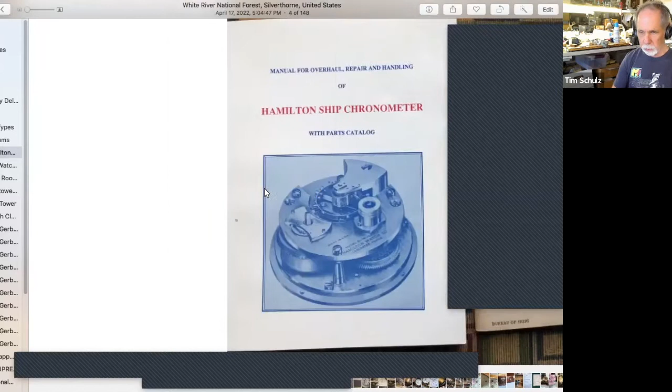These are reprints of the technical manual that the military or the Navy published for servicing and handling of the Hamilton ship's chronometer. The book on the left is the same as the book on the right, just slightly larger and printed on higher quality paper. You can also find, I think, all of this as PDFs online in various places.

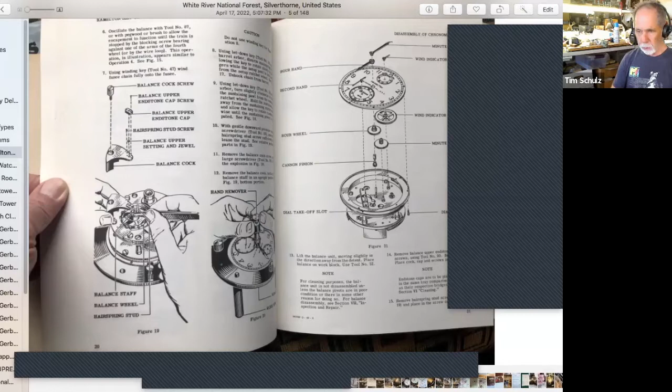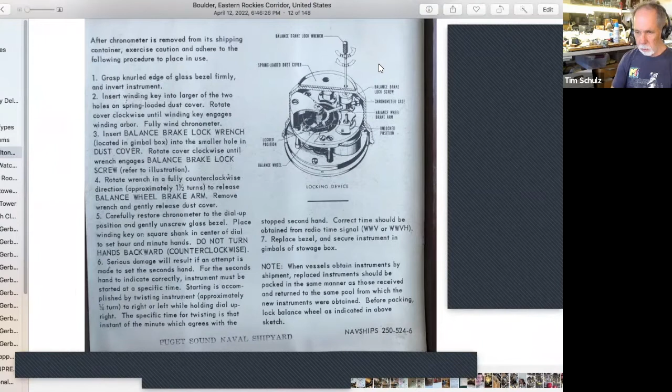This is one that you could do without removing the chronometer from its bowl. This was the original Hamilton balance locking device, which was a simple little arm on a screw that you would swing around and capture the mean timing screw on the balance, the weight, and that would lock it in place.

I actually like this design the best, but you have to take it out of the tub, and you have to get this thing on the balance wheel without damaging it. The Naval Observatory decided it'd be best if they could avoid that. The very first Hamilton chronometers didn't even have this—they had nothing.

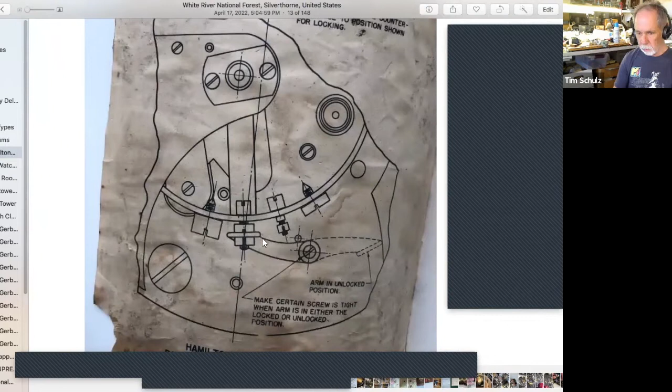In the late 1930s, actually June 26th of 1940, the superintendent of the Naval Observatory put out a request to all American manufacturers to build a marine chronometer for the Navy. The Navy was in the process of massive shipbuilding and needed marine chronometers, but there was no marine chronometer business in the United States building these larger chronometers.

During World War I, they were taking higher quality pocket watches and sometimes putting them in little gimbaled mounts, sort of like what we'd call torpedo boat chronometers, but they weren't necessarily dedicated detent chronometer escapement devices. They were just highly finished conventional pocket watches.

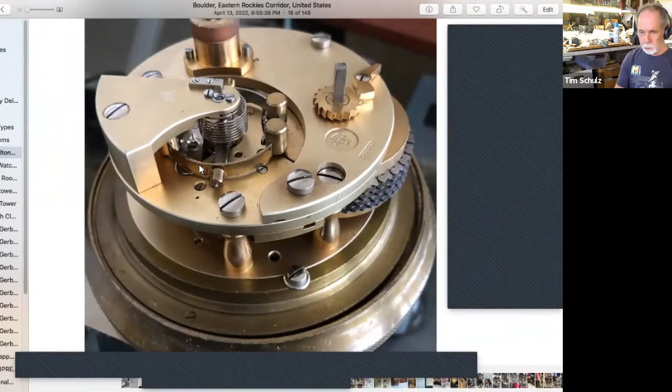So here's a picture of the Nardin chronometer. This is a split balance between these two weights, with a split on each side, and these are mean time screws, which are for adjusting the rates. These balance weights can be moved back and forth—there's screws on them, so they can be moved along this bimetallic arm that expands and contracts according to temperature and also centrifugal forces.

This style of chronometer looks very much like the Liverpool chronometers. If you put this one and a Mercer side by side, sometimes you didn't know what they were—you'd be hard pressed to know the difference. Same thing with the Russian chronometer.

That's just a close up of their logo, and another side picture of it.

This is the mainspring barrel, and this is the fusee. The fusee has this tapered cone that the chain goes up on, to try and equalize the mainspring forces as it winds down.

On the Russian chronometer, rather than having this go straight across, they do what they call a reverse fusee. The chain goes around on the other side of the fusee and winds up crosswise. The reason is that with the standard setup, there are wear forces on these arbors and they tend to ovalize in the direction of the mainspring. With a crossover, they don't have as much force in that direction, and the holes tend not to ovalize the same way. So Victor Kullberg and the Russian chronometers, I believe, use a reverse fusee setup.

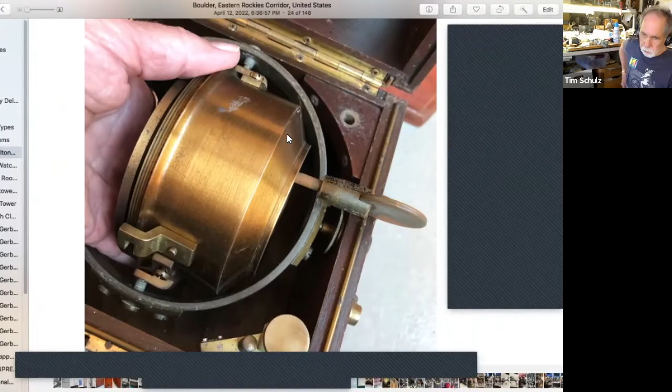Here's another close-up picture of the dial. To get it out of the tub, whether leaving it in the gimbal rings or taking it out, putting the winding key on the winding arbor and pushing it out into your hand is the way to do it. You can flip it over and sometimes it'll just drop out by gravity into your hand, but not always, so using the winding key is a safer way to do it. Then you lift it out.

Honestly, an easier way to deal with these, especially if you're going to service them, is to take the whole tub out of the gimbal rings, because I use the tub as a movement holder, and we'll see pictures of that in a bit.

Here's my Hamilton, my victim, or however you want to call it, out of the tub, and you can see this balance locking device. There's a spring arm that goes across, and this Allen screw that pushes down. These white things are dust rings that try to seal against the back of the bowl to limit dust. You can drive this down, and there's nylon tips on both sides of this fork that push on the surface of the balance, immobilizing it. Another view from the other side.

Some differences you can see: on the Nardin, there was what we call a setup ratchet on the mainspring. You don't wind the mainspring directly, you wind the fusee, but you put some preset wind on the mainspring even when it's fully unwound, and this setup ratchet does it. In the Hamilton, they've got this beautifully finished cover, a nice spring, and a pivoted ratchet on a fine ratchet wheel. If you go back and look at the Nardin, you just see a little brass ratchet wheel and a click on a screw that you manually push against the ratchet as you adjust it. Some Liverpool chronometers have a beautifully blued and flat polished spring that comes around to tension that. This kind of setup is a bit of overkill, and this fancy balance lock is overkill too, but that's what the Hamilton ended up with.

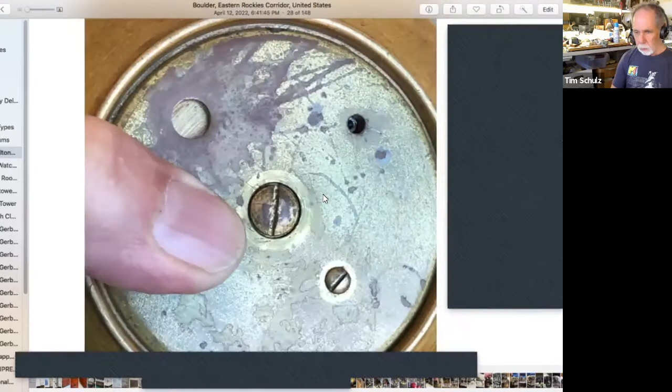There I'm showing the rotating dust cover on the bottom of the chronometer bowl. With these modified Hamiltons with the fancy balance lock, you've got two holes in it: one gives access to the Allen wrench or Allen screw, and this is where it's opened up to the winding position.

If you wanted an accurate indication of when things happened on a strip chart, you would hook up a break circuit chronometer to one of the recording pins, and you'd get regular impulse marks depending on your timing signals. You could get 1 pulse per second or 1 pulse per minute, it varied by use. These were often modified at the Naval Observatory for this function.

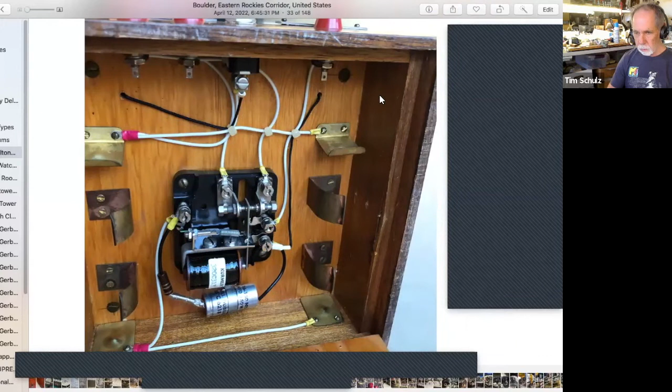We're showing some of the connections on it, this is the bottom side. You'd put in 4 D cells, and there was a relay that would isolate whatever you're driving from the chronometer, because you didn't want to damage the fragile switch within it.

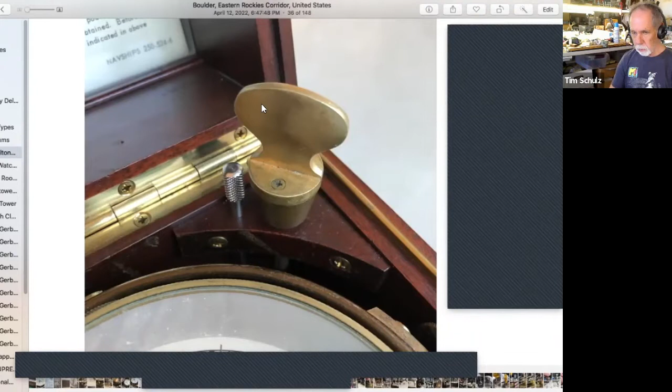This is a performance certificate that came along with this particular brake circuit chronometer, with notes on chronometer performance. This is an actual Hamilton key, with its different shape. And this is a little auxiliary Allen wrench tool for locking the balance, and that's what it looks like.

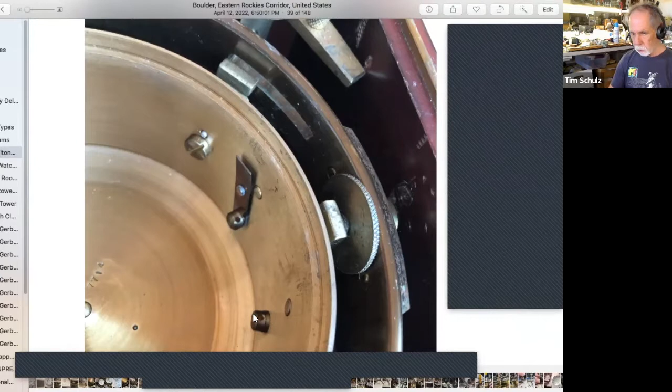These are the connections to the brake circuit on this particular chronometer. You can see these fabric covered, highly flexible wires that allow it to still gimbal if necessary. This is the connection to the switch, and the other side of the switch is connected to the tub of the chronometer.

This is actually the 4th wheel, and this star-like ratchet wheel on top is what actually drives the switch. The switch is based on another detent spring, basically. I'm guessing this impulses maybe once or twice a second.

Another attempt to show it, although it's not focused very well. This is how the Allen wrench works inside this locking tool.

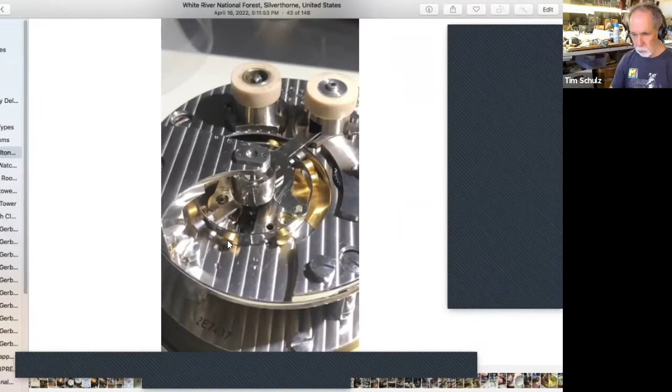Don't know how well this will play, but are you seeing the balance wheel going in slow motion? Yes, you might even be hearing a tick. This is using an iPhone in slow-mo showing the balance going. The balance actually swings more than 360 degrees - if you follow the arms, it rotates quite a bit.

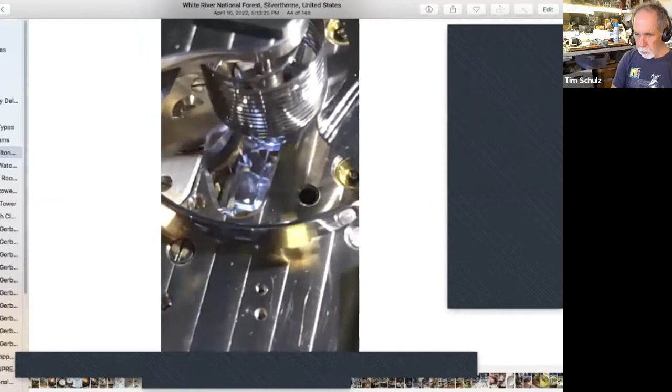This is showing the escape wheel. You can see the detent, there's a black looking object right here - this is what we call the locking jewel. That blocks the escape wheel from moving, and it moves the detent spring when it comes back and unlocks the escape wheel, and then the escape wheel teeth hits the roller jewel and impulses the balance in that one direction.

Another attempt at showing the roller jewel down underneath, or the roller table.

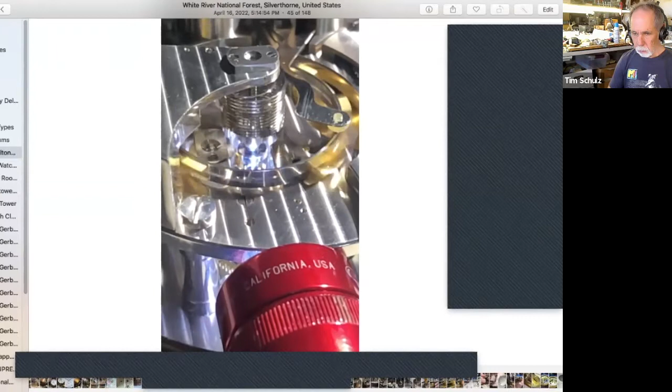So to take the chronometer apart, you first have to stop and remove all of the tension off of the escapement. If you try to take a chronometer apart while there's power on the train, if the escape wheel starts spinning, you bump the detent and move the locking jewel away, and the escape wheel starts to spin more than a couple teeth, then you let the locking jewel come back into place - it will shear the locking jewel right off because it's usually a ruby. Sometimes they're replaced with hardened steel, but you'll either break the locking jewel or break the detent itself.

Detents are expensive and hard to find, and in some cases you have to make them if it's an antique chronometer. So normally, to stop the escapement, they block the fourth wheel - the wheel that drives the escape wheel, which also has the second hand coming off of it. Hamilton included a screw in most of their chronometers that goes through the escape wheel bridge, which you can lower down to block the arms of the fourth wheel. In this particular chronometer, somebody took the screw out and didn't replace it.

So you have to do a different technique where you form a wire hook, and hook the spokes of the wheel to this particular pillar. I'm using some 22 gauge spring brass that you normally use for making little springs and clocks. I bent it into a hook shape that I'll hook around this pole and lay onto the wheel.

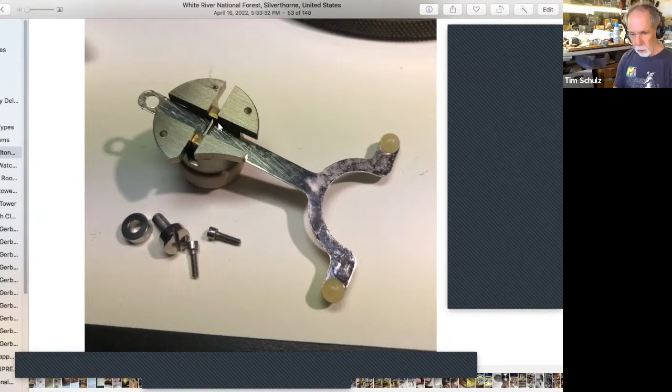Again, it's a fairly complicated little bit, and I kind of went out of sequence here. I'm starting to take the balance out, but I haven't undone power on the mainspring. If you follow the service guide that the Naval Observatory published, you're supposed to remove all the spring power before you start taking the balance out. I got ahead of myself here, but I'll show it anyway.

So the balance is stopped, and the hairspring stud is right below this screw here on the bottom side of the bridge. You undo the screw, and it just naturally falls down and becomes hanging free. And there it is, loose — there are a couple little pins that go into these holes there.

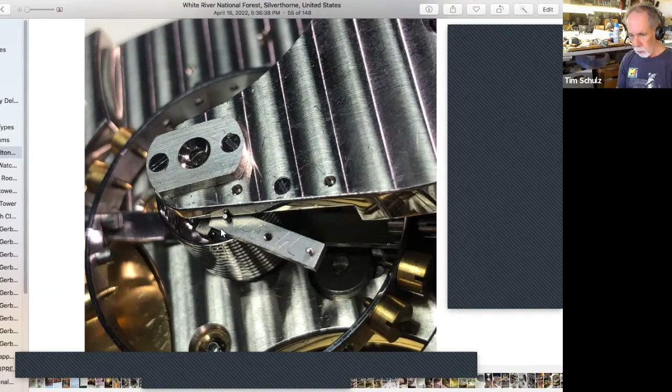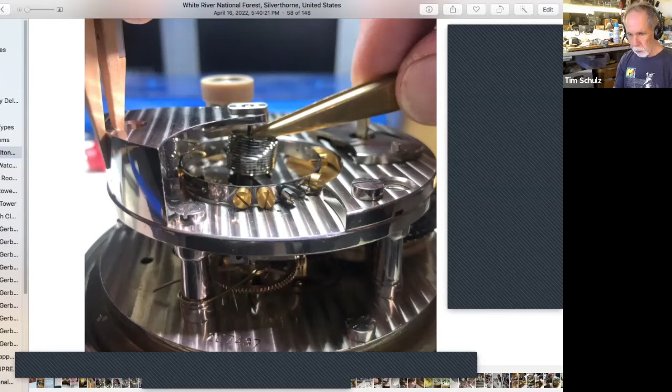So then you take out the balance cock screw and you can loosen up the balance cock. It's probably better to use your fingers — I didn't have my finger cots on, so I used these tweezers. You're supposed to grab the balance shaft, pushing the spring a little bit out of the way with tweezers, holding it in position while you remove the balance cock, and then carefully remove this out of the way.

You have to be careful that you don't catch the detent, because you can bend it if you snag it. The detent is right underneath here, and this is the screw that holds the detent in, where my cursor is circling.

Dave Cooper's recommendation is that you actually take the detent out first. He says that's the first thing you do, so that if anything happens and the escape wheel starts spinning, it just hits the roller jewel on the balance wheel, knocking the balance wheel out of the way without breaking anything. But the detent is kind of around a bunch of stuff — you've got the escape wheel and the bottom side of the balance wheel that it engages with, so you have to be careful about getting it out.

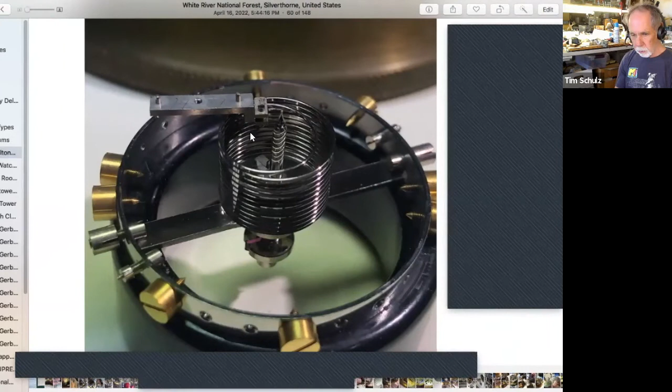So anyway, here's the balance wheel off, sitting on a little roller ring. We have these weights on it that go around for adjusting the rate — meantime screws here and here, and then some fine adjusting screws here and here.

Comments on the Hamilton balance, which I didn't cover earlier: the balance rim is stainless steel, and the hairspring is Elinvar, which Elgin, or Hamilton, had the rights to, and the arms are Elinvar too. Elinvar doesn't change much with temperature — it's very temperature stable. The original chronometer specs that the Naval Observatory put out were written in the late 1910s, like 1918 or so, and specified split rim balances and steel hairsprings. So it was a bit of an obsolete specification at the time Hamilton designed this chronometer, and they asked for an exception to the rule, and they got it.

Now, how the Hamilton balance works and why it works so beautifully is that with heat, the balance rim expands, but because these arms are silver soldered to the rim, it ovalizes — the middle part on both sides between the arms spreads out. And the hairspring, being Elinvar, doesn't change its characteristics with temperature, so it's very stable. They had 24 holes drilled around the rim, and by moving these balance weights around, they could get the mid-temperature balance correction done extremely well. These weights here are adjusted in and out to control the base rate.

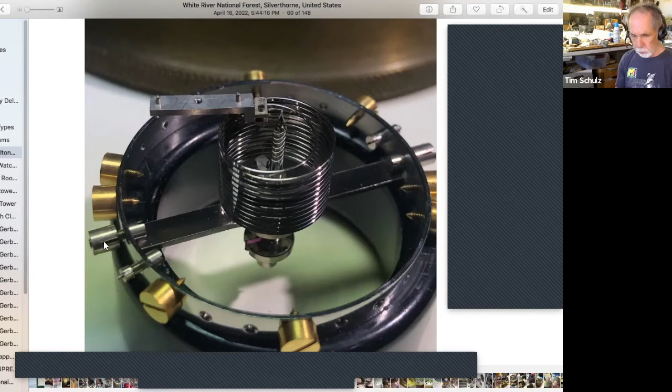They had a special little screwdriver with a round shell containing a bubble filled with fluid, a little bubble, and markings around the rim of this round bubble level that's along the axis of the screwdriver. You can look at the bubble floating to the top of this plastic disc, which has graduations on it, so you can adjust these things in partial turns. One full turn adjusts the rate by about 1.5 seconds a day; one full turn on this other part adjusts it by about 1/10 of a second. If you use the bubble level and go by fractions of a turn, you can adjust it using this fine weight to 1/100th of a second per day, potentially. So it's easy to adjust.

Here's the bottom side. That's the roller impulse jewel there. There's another little jewel here which you can't really see, that pushes the detent out of the way and allows the escape wheel to unlock. The balance wheel is held on with screws to a hub on the balance shaft, and on the bottom of the arms you'll see the serial number of the chronometer scratched on them.

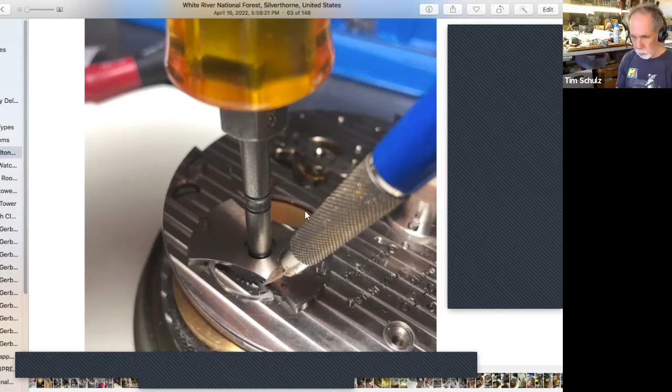Now I'm going to release the power. Normally the process, as the repair overhaul guide says, is you wind all of the fusee chain onto the fusee, then release the mainspring power using a letdown key, and you have to release this little click here.

I tried winding the chronometer up with it out of the tub, and I found I couldn't get enough twisting force on it. The spring is so powerful I couldn't really wind it up without it wanting to twist on me on the workbench. So I said, I'm not going to do that.

Instead I'm just going to release whatever power is in the mainspring with most of the chain actually on the mainspring barrel. You can see there's a fair amount of chain on the mainspring barrel. Even trying to do that with the letdown key, I found it impossible to do.

So what I had to do was put the whole chronometer movement side up in the tub. I've got the movement on the tub, and I'll show you a picture of that, and hold it between my legs so I could clamp it hard enough.

Then I could turn this thing clockwise to release tension on the click, pull the click out of the way, and slowly let the power down with this letdown tool. This is a letdown tool—it's smooth. Never use a chronometer key to try and do this, because you can't do it carefully enough.

You can make handles for your chronometer key. Take a wooden broomstick or a big dowel, drill a hole the size of the body of the key, then cut a wide slot in it to take the handle, and you can use that as a handle for your chronometer key. But in general, these clock-specific letdown tools are much better. Just as an FYI, a number 3 is the size that seems to fit.

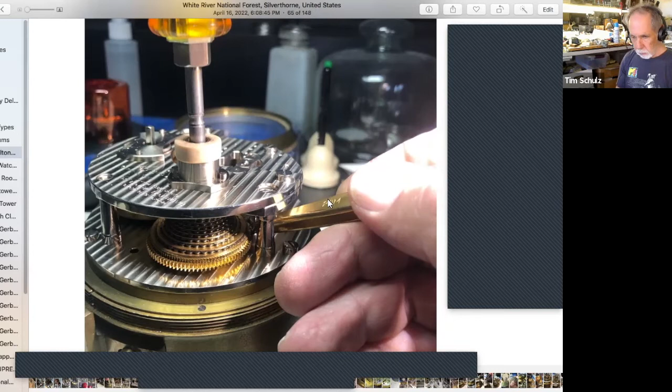So what I did, I'm just showing it there. Now I've gotten the fusee chain all wound up on the fusee. Again, I held the click out of the way, put the letdown key on the fusee, and wound it up, so the whole mainspring barrel was rotating freely as I wound up the chain onto the fusee. And then what I'm doing here with the tweezers is there's a ratchet wheel above these gear teeth.

The ratchet wheel is for what they call the maintaining power. There's a maintaining spring sandwiched between these two levels of the fusee. When you're winding up the clock, the maintaining spring is still providing power on these teeth, so it keeps the chronometer running while you're winding it. Harrison actually developed that. But you have to release that because there is still tension on the train.

If you pop the fusee chain off but don't release the maintaining power, and then you start taking things apart, you can still break your locking jewel. That's not an uncommon thing for clock makers to do when they want to do a quick clean and oil on these things, so you've got to be careful about it. Now all the tension is off everything.

You can actually pry off the end of the hook that goes into the mainspring on the fusee. I'm just prying it out with a jeweler's screwdriver, and pop, it comes off, and there's still a little bit of roll in there.

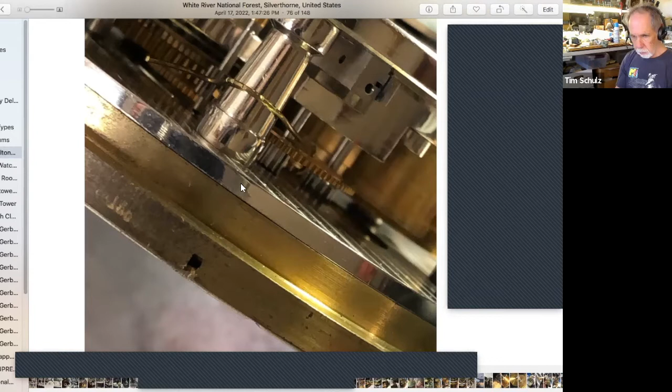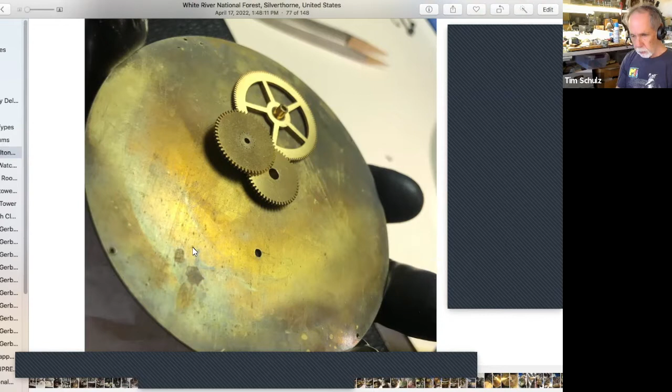Then you flip it over, and here you can see how I'm using the tub as a movement holder. The dial is held on with 4 screws on the back side on this brass rim. You loosen those up, and you're supposed to hold it in the palm of your hand with a piece of tissue paper, and get all the screws out. Then on one side near the balance wheel, there's a notch in the dial rim, and you can put in a screwdriver or a piece of pegwood or toothpick, and pop the dial off. In my case, all the under dial gears came out with it, but here I put them back on to show you how they look underneath the dial.

This is a power reserve indicator, and it's actually just driven by the fusee. The fusee is really a great thing for power indication because it basically moves as the spring winds down, so you can just reduce it and get a partial arc for the wind status of the clock.

And then of course we have the hour wheel and the minute wheel there, and here they're pulled off, and we've got the cannon pinion there. So there's all the parts. These are the 4 screws that hold the dial on.

Now I'm pulling this guy off, again using my little well-used gear puller. Unfortunately I didn't have enough length in it to get it all the way off, and this particular thing was still stuck on there, so I had to find a little steel collar and then use a couple levers to get the final thing lifted off.

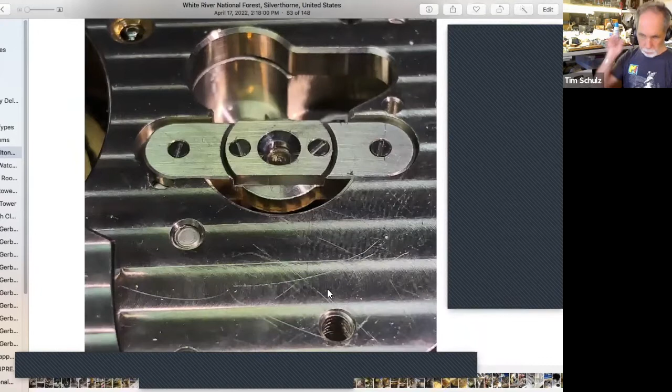Once you've gotten all those screws off, you then flip it back over to the movement side, and we're looking at the top of the escape wheel bridge. So you take the escape wheel bridge off, and there it is off, and there's the escape wheel sitting loose in there. And we're looking at the top of the detent here.

So this is the bottom of the balance wheel, the lower balance wheel jewel—maybe it's the upper, I don't know how you call it in these things. There's a locking jewel here, and there's a spring back in here that you can't see, and there's a spring here. This is what they call a passing spring.

So when the balance wheel is swinging counterclockwise, the jewel that trips the detent hits this, but it passes—it allows it to pass. This spring flexes, and that jewel passes, but the detent doesn't release the escape wheel until it comes back around this way, and then it hits the spring on this side. There's an arm here that holds the spring, and that causes the whole detent to move in this direction as it comes back around clockwise, and that pulls this jewel away from the escape wheel, and then the escape wheel can move one tooth and impulse the balance wheel.

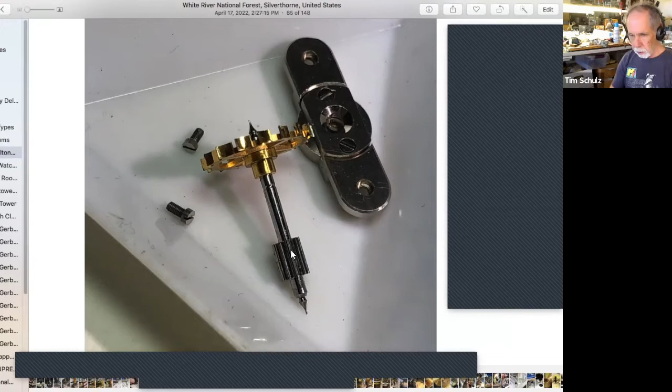So there's the escape wheel out and the top escape wheel bridge. And again, we're looking down at the detent, just another view of it buried down underneath the plates. I have to remark that is a beautiful pivoting job on that escape wheel. Yeah, they are nicely finished—finished like balance wheels, they've got that same finish, and they are capped also.

This is the detent block, as they call it, right here, and this is the escape wheel bridge. They say use a wedge, and give a tool number, but this is actually just a piece of sharpened pegwood that you jam under there, and that forces the detent back up against the plate, so that you can take the screw out right here. Then you pull the pegwood out, and then you can grab the whole detent block assembly and pull it out.

So again, there's this, I think they call this the passing spring, and then the main detent arm is here. And then there's some adjustments on both how far this goes in and how far this is positioned in this direction as part of the whole detent setup.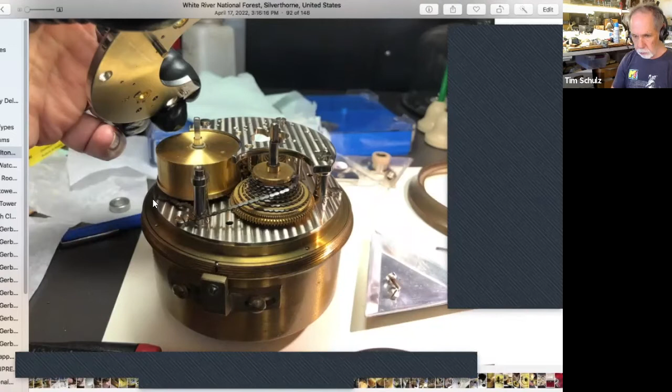So then we're going to take apart the setup ratchet bridge and pull that off, and this is the setup wheel down here. Then you take off the winding dust cover arbor, whatever you want to call it, and there's a spring and another collar here that's to help keep dust out of the movement.

And then you can pull off the screws, pillar screws on the mainspring bridge, and pull that off. Here the fusee chain has fallen on the outside of this pillar. So this comes off. Now I did find that the screws holding this bridge on, and the motion works...

The screws were really tight, and again, I had to use a lot of force to get this off. What I found I had to do was put the large screwdriver in the slot, push down and hold it firmly, then rotate the actual whole chronometer assembly. I've been told this by other watch and clock makers, that sometimes when you got a really stuck screw, rather than trying to twist the screwdriver, twist the thing holding the screw. So it's a whole lot easier to just, with all your might, keep the screwdriver in the slot so it's not going to come out.

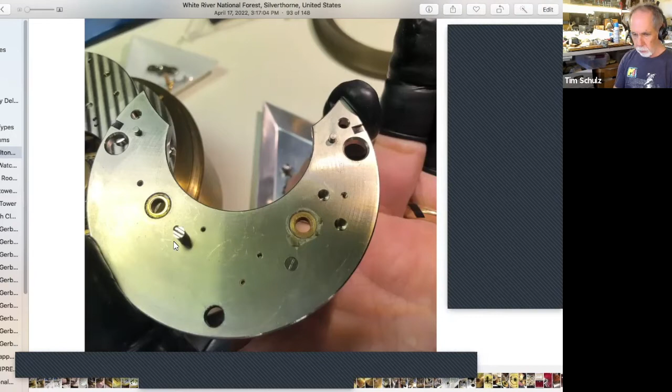So here's the bottom side of that bridge. This is a fusee stop screw, and I'll show you how that works in a moment. And that's the top side, and I still have the ratchet spring on there for the setup.

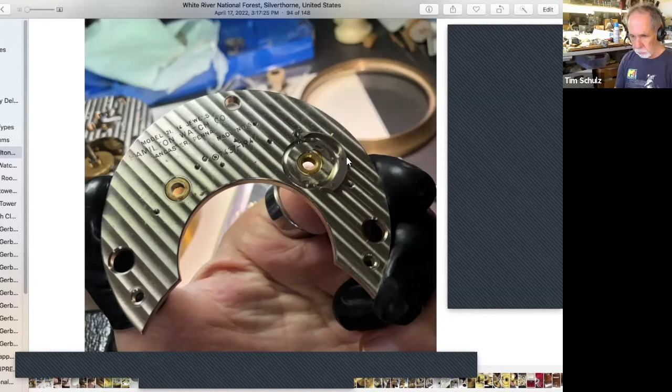In the disassembly manual, they take all of the stuff out. For you and I cleaning it, you don't have to do that. You can leave these springs on. I think you just have to make sure you get things dried out.

This I'll probably clean in water-based clock cleaning solution. So maybe I will take that off so I don't get trapped water rusting the screws in there. Actually these aren't held in with screws, these are just held in with these two locating pins. But a lot of people clean these in watch cleaning solutions or solvent based clock cleaning solutions.

So here's just showing the mainspring barrel and the fusee again. So then you take out the mainspring barrel. In this particular chronometer, all the oils had actually set up, and it was very difficult to lift the barrel out, it didn't want to come out. I actually had to rotate the barrel back and forth while I pulled up on it, and I eventually was able to get it out, but it didn't just lift out. You can see a little bit of grease on the end.

The nice thing about the Hamilton mainspring is that the cover is held on with 5 screws. All other chronometers, at least the European and Russian chronometers, use a snap cover. So this one is actually held on with screws, so it comes apart very easily. I'm not going to go through taking apart the mainspring in this example.

So here's a fusee chain. This is the fusee stop bar. What happens is that this bar is in the track of the fusee chain, and as you hit the end of the wind, the chain pushes on this and pushes it in, and extends it on the other side out, and that hits that stop screw.

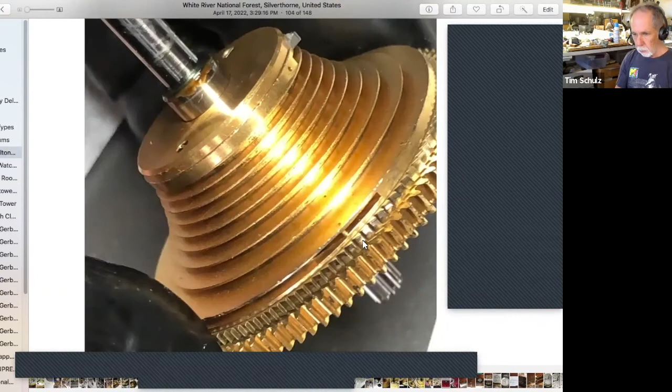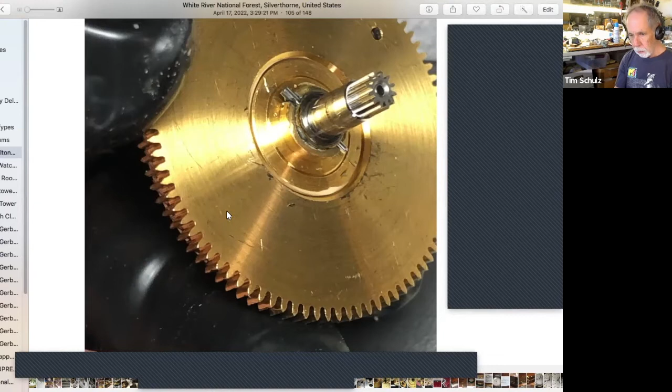Here we're showing the chain grooves. This is the little pin that the fusee hooks onto, and this is the bottom side. This lower half of the fusee barrel is held on by a taper pin, so you push the taper pin out. This is the top side, again showing the fusee locking stop bar that goes through there, and I'll show that with the cover removed.

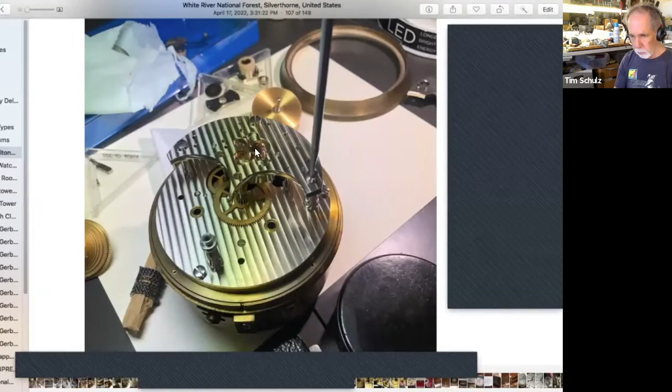So now I'm removing the train bridge, and I'm showing a bunch of grease in there. I got the screws out, and again I had to hold the screwdriver down with a lot of force and rotate the whole movement on the bench, and I couldn't lift the plate off.

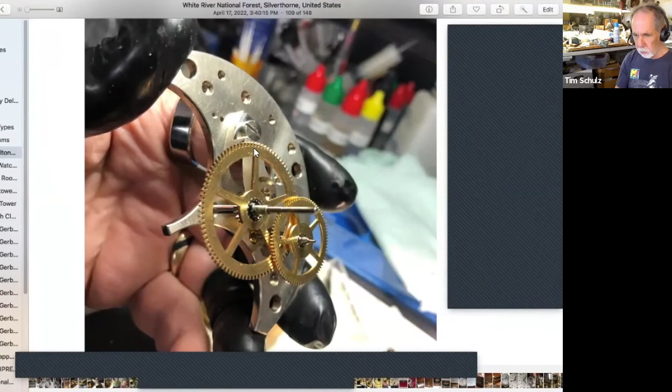It was glued in with this hardened grease. So in the end, I got it off, but these two gears were stuck in it, and it took a little bit of effort to get them off. And then this is the bottom side of the escape wheel and balance bridge right there.

Now we're looking at the bottom side of the dial plate. This is the ratchet for the maintaining power, and it's got a straight spring that fits in a hole on the upper plate, and then the pivot there. And again, looking at the bottom side of that bridge, top side of that bridge.

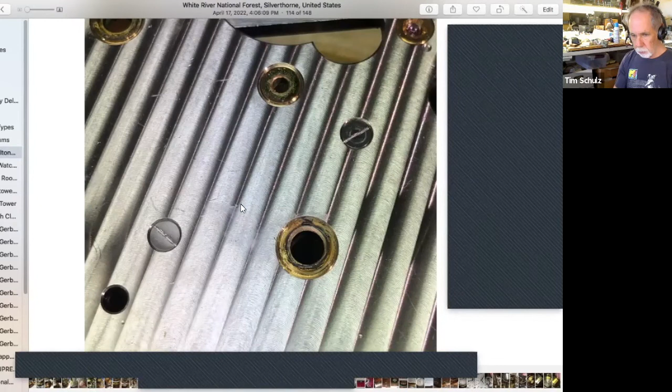This is the dial side bridge. I'm just showing these two screws on it. Those are actually posts for the wind indicator and the minute wheel, and that's kind of nice because they're screwed in. In a lot of cases, they might not be screwed in. I think on the Russians they're possibly pressed in. I think on the Nardins they might be screwed in, but there's a flat wrench spot on the top side. I've taken the bridges off there, train bridge off.

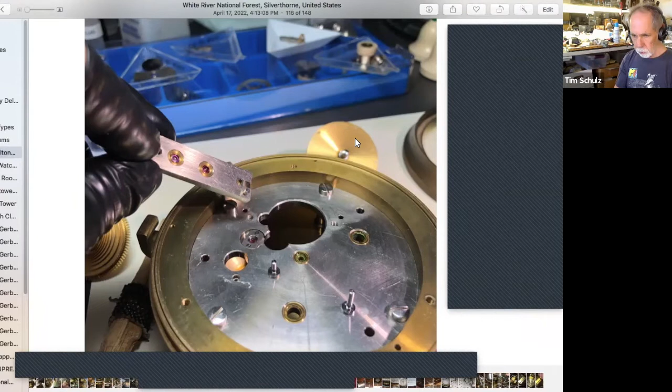Now I'm removing the cap jewels, and these are all marked. So in this particular cap jewel, there are 4 little divots marked down on that side, and there's 4 little divots on this side showing that this belongs here.

And that's done partially to also deal with end shake. These things can be adjusted a little bit in terms of how they depth, and this jewel in this hole here can be adjusted a bit. So you want to keep these things together. Normally if it's been serviced, they'll be marked, and if they haven't been serviced, they won't be marked, and you have to mark them or keep track of them yourself.

Now I'm showing this taper pin, and I pushed this thing out and actually used a little bench vise to push that out by squeezing, holding it at an angle on the vise and closing the vise and pushing the skinny side out.

So now I've separated this assembly with the maintaining power from the actual ratchet wheel, or the top of the fusee. So this is the winding ratchet right here. That's the gear that drives the power reserve indicator. And then we've got two little ratchets here, ratchet clicks, and then brass ratchet springs.

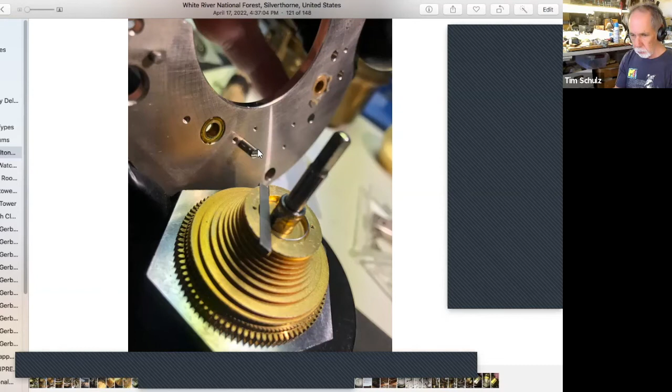Here I pulled the cover off the stop bar. Again, the fusee chain, there's a little spring here holding this bar out in this direction, and the fusee chain comes around, pushes this bar forward in this direction, and it hits this screw here, and it can't go any farther. A close-up of the spring. This is probably pretty seriously over lubricated.

And now I've separated these two halves, and this is the maintaining power spring. It's got a bar on this side of the spring that engages in this hole here. You can basically, when it gets wound up, it just gets tensioned a little bit and can provide enough power to keep the chronometer running while you wind it.

So here's all the bits and pieces. I haven't bothered counting them, but you can see them all in their respective trays.

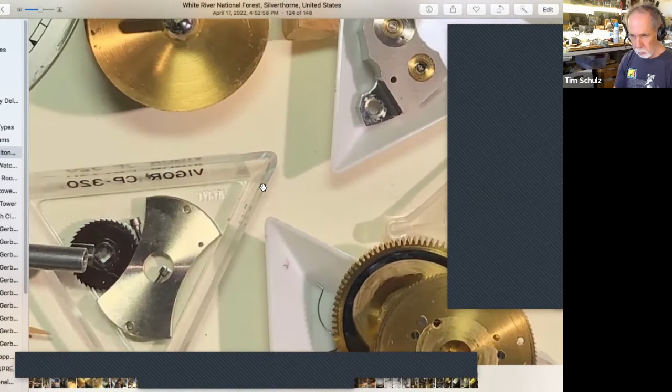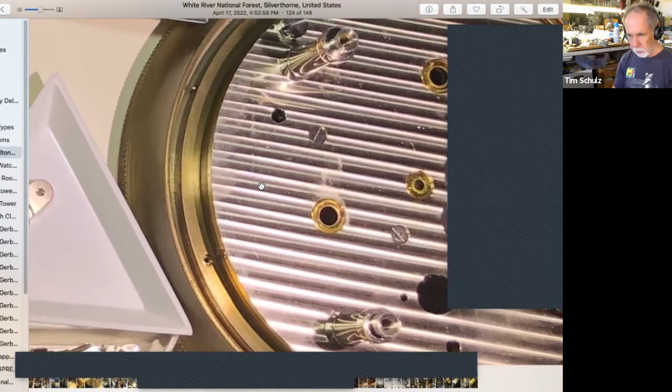So I had anticipated that I'd just take this chronometer apart and then put it right back together without doing anything. But after encountering all the hardened grease in it, I think I need to really go through the process of cleaning it, so I'll probably run all the small parts. I have a Tempo 400 watch cleaning machine, and I'll use watch cleaning solutions on all the parts that will fit in the Tempo. And then the main plates, maybe I'll do them in an ultrasonic cleaner, but with watch cleaning solution rather than water. I haven't decided. Now, I haven't taken the pillars off or removed this from the dial ring.

But if I pull these, there are screws around the periphery, I can pull this plate off this brass ring, and then I can also remove these pillars. They should also be marked to location. They suggest you make scratch marks or divot marks to make sure you get the pillars back in the correct position. So I'll stop sharing at this point.

So any questions, you guys, on all of this? I've rambled for an hour plus.

Around what time did these kind of fall out of vogue, I guess? I think probably in the 70s is when mechanical marine chronometers started being replaced. Well, it was with quartz, so it was late 70s. So it'd probably be late 70s, early 80s when things were starting to be replaced with electronic technologies, and the mechanical chronometers were becoming less common.

With glasnost in Russia, huge quantities of Russian chronometry equipment came onto the American and Western markets. Dave Cooper talks about going to the nationals in the 90s, and people would be pushing the hotel carts that they used to load table stuff on and wheel them into the table. These hotel luggage carts would be packed to the top with chronometers, and they'd be pushing them in, and they'd be falling off even. There's just so much stuff that came out.

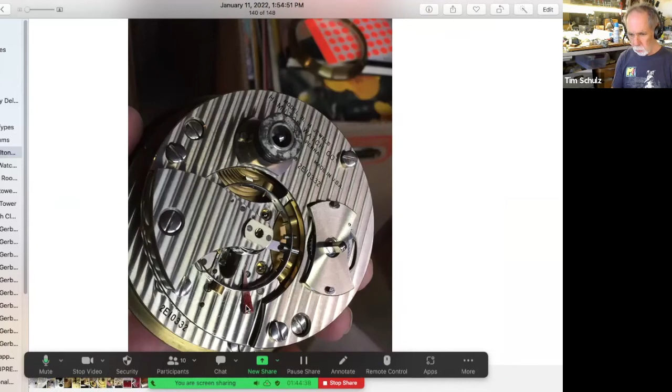Here you can see the wedging, a way that you would wedge if you didn't have some sort of stop assembly. This is a little tapered wedge that Bert had made. I'll actually just use wax tissue paper, fold it up a few times, and stick it under there without a whole lot of force. You just have to keep the balance from moving. It doesn't have to be held in with great force.

I think it's more close-ups of his movement inside of the tub.

When you shop for chronometers, especially Hamilton chronometers, you'll often find overhaul notices on the inside of the bezel. So right on this polished inside surface, they'll stick on a paper label, and it'll give the number and a service date. You'll sometimes find that the bezel number does not match the chronometer. It turns out there were a lot of different contractors doing service on these marine chronometers, especially with Hamiltons, and what they would do is when the chronometers would come in, they'd take the chronometer out of the tub and just throw the tub and the bezel into a big box full of random bezels and tubs, run the chronometer through the service line, then grab a random tub and a random bezel and put it back together and send it back out. So that's not uncommon, and you don't have to stress about such things.

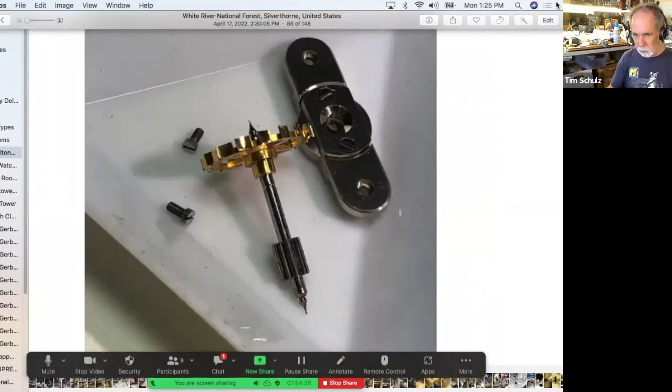In terms of the boxes, they came from a third party manufacturer, and I actually have several of the inner boxes uncut that a guy on eBay sells occasionally. He usually does a starting auction of $25 on the box, so I would just do a $25 snipe at the end of the auction, and I got probably four of them, thinking I'd cut them apart on a table saw and turn them into chronometer boxes. But it's a little more complicated than cutting them apart, because you have to actually route a slot, since they have these brass plates that go around each of the decks, that levels sort of engage in a slot on the next one above to keep it from warping, breaking, and misaligning. But a lot of this stuff came from third parties - the Hamilton and the Elgin outer boxes look really pretty much identical.